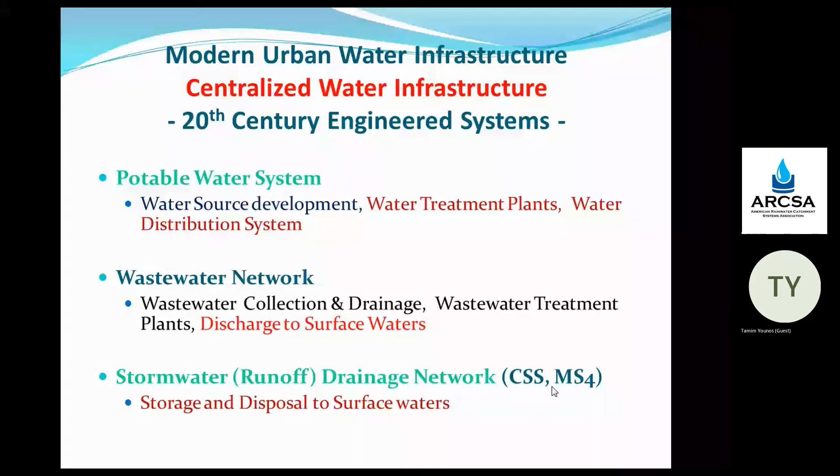So centralized water infrastructure brought a lot of good things to urban areas and a lot of healthy life. But now as we are entering the 21st century, we see the aging of this infrastructure, with a lot of breakdown and leakage. We see water scarcity and flood in urban areas. We see the need to adapt to climate change and extreme weather conditions. We see energy intensive water infrastructure. And we see cybersecurity issues, which relate especially to centralized drinking water infrastructure.

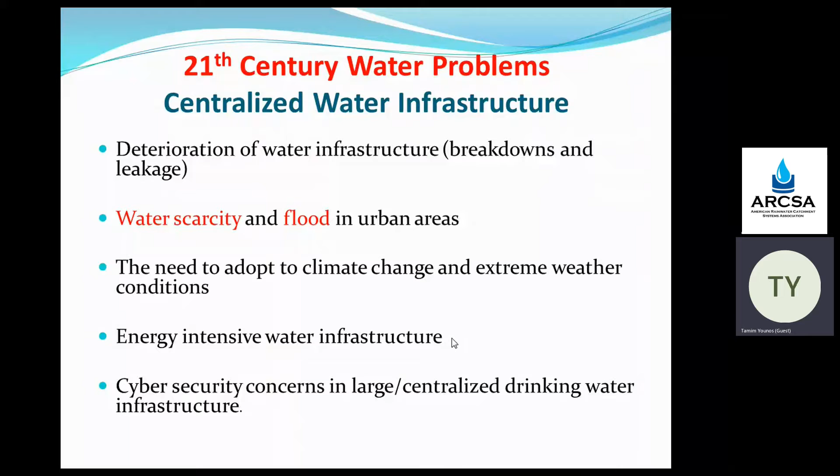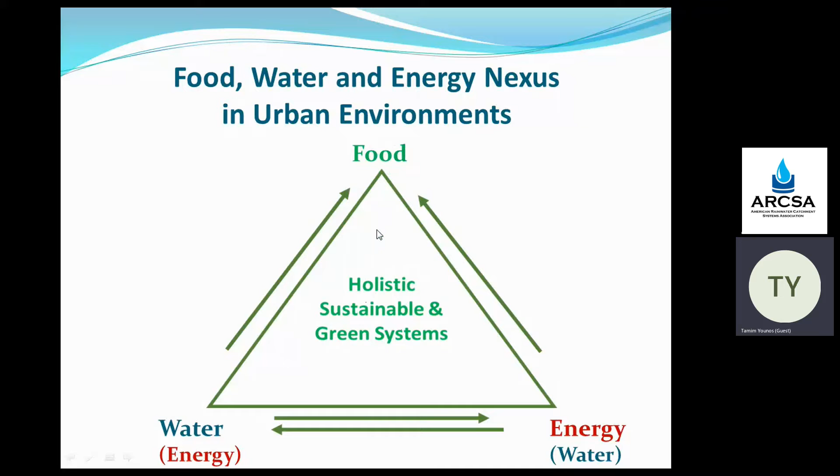So from centralized systems, we are moving to decentralized water infrastructure. And basically, these are smaller scale water management and water infrastructure systems, which are not centralized. So we can have smaller scale, we have it localized.

Here is the vision for a future. If you see here, we show decentralized water infrastructure, which has got several components. If you see rainfall, rainwater harvesting is one component. We have porous pavement, for example. That's another component of this decentralized system. We could have rain gardens, another component. Urban ag, like we could grow food around here and other things. So this is kind of the water component of it.

And also this building and these paved areas produce wastewater and also stormwater runoff. So the vision is that we have a decentralized or smaller scale advanced water treatment system nearby, that we treat wastewater and we treat the stormwater, and the treated water is returned back and used inside or outside the building.

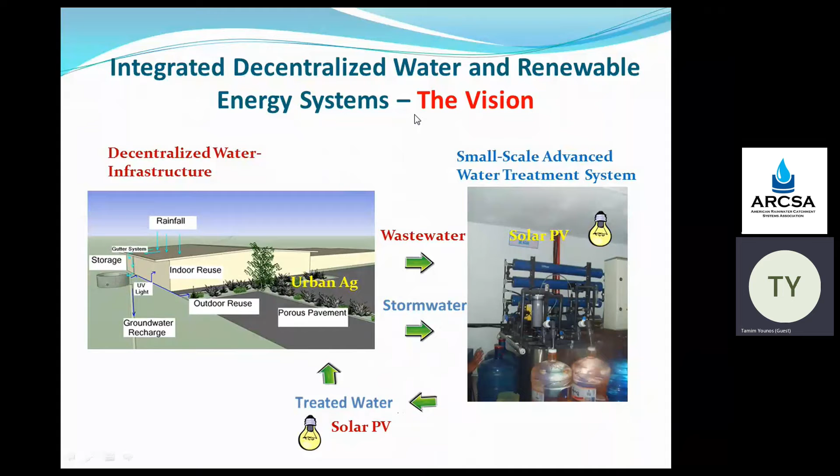So normally water treatment is energy intensive. So the idea is also to use locally available renewable energy, such as solar in this case, to treat this water and deliver it back for use to the building or surrounding areas. So basically, this is the vision which partially is happening, but still we are not there.

So functions and advantages of decentralized water infrastructure. It enhances the potential for using locally available alternative water sources. Alternative means it's not the surface water, it's not the groundwater. So it is probably rainwater, stormwater runoff, maybe saline water, which is brackish water, salt water, or wastewater. These are alternative water sources.

The other major element is energy conservation. When we are using centralized systems, we bring the water from remote areas. So we use a lot of pumps, for example, and we use a lot of energy. So the potable water systems for centralized systems are very energy intensive.

But with decentralized systems, since we are trying to use local water sources, we save a lot of energy there. And also with smaller systems, there's more potential to use locally available renewable energy sources, as I showed you the solar PV in the previous slide, for water treatment and also for in-building water distribution.

And then also decentralized systems enhance cybersecurity. If you are watching the news, centralized drinking water systems are under attack. With a larger population, there's larger risk. Centralized systems sometimes serve thousands and millions of people. But with smaller systems, we serve a smaller number of people. So cybersecurity is a little bit more safe for decentralized systems.

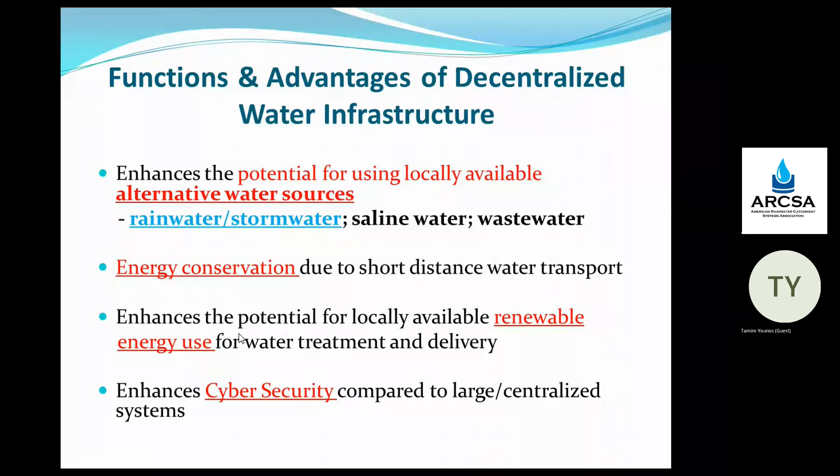So as we know, the topic of our talk today is rainwater harvesting. And rainwater harvesting is a major component of decentralized systems, which have other elements too. Within rainwater harvesting, there are two major branches. One is rooftop rainwater capture and use. The other is stormwater runoff capture and use.

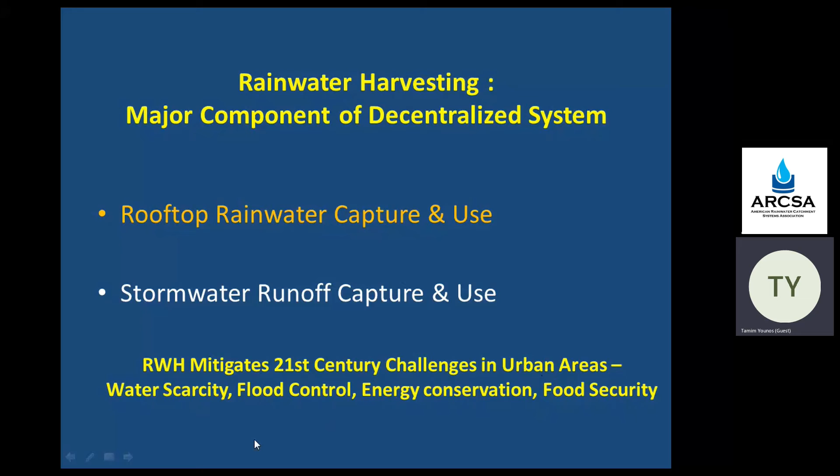So basically, rainwater harvesting systems mitigate the 21st century challenges in urban areas. It deals with water scarcity, flood control, energy conservation, and food security. And these are all advantages of rainwater harvesting systems.

So here on the left, we show rainwater uses, on the right, benefits. All these uses bring different types of benefits. Like indoor uses, rainwater is used for non-potable uses such as flushing toilets and cooling, which is becoming common nowadays, but not as common as we'd like to see it.

So if we use rainwater for indoor uses and also outdoor uses, shown here, lawn irrigation, car wash, gardening, it facilitates water resource conservation. This amount of water we do not bring from surface water, but we use rainwater. Normally at least 2/3 of potable water is used for these purposes, and rainwater could be used instead.

So emerging uses: potable water, urban agriculture, groundwater recharge, and urban aesthetics. Potable water, of course, rainwater has been used for drinking for centuries, but here we are talking about larger scale commercial buildings, a larger scale of rainwater use compared to a very small household, which already use rainwater in many places.

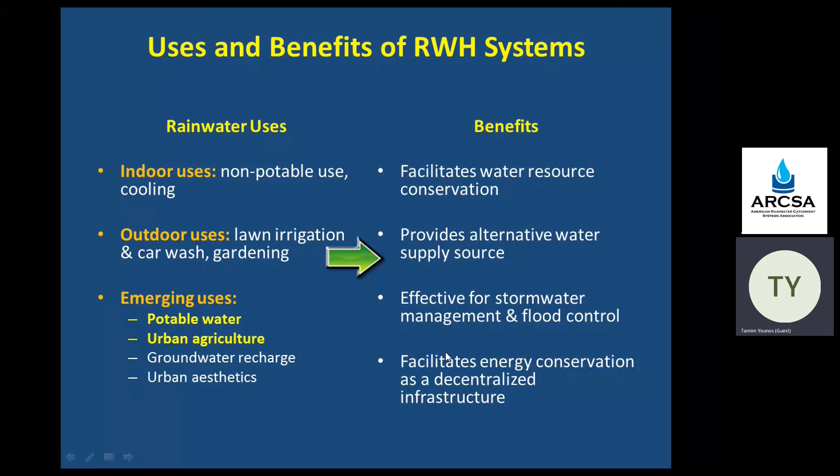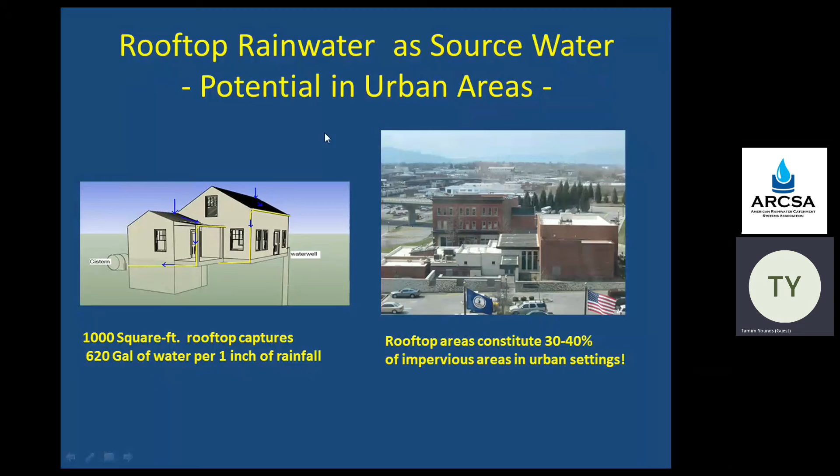The other one here, rooftop areas constitute 30 to 40% of impervious areas in urban settings. So as we said, we have two types of impervious areas, paved areas like roads and parking lots, and rooftops. So rooftops are 30 to 40%. And our talk today mainly relates to rooftop rainwater applications.

So to give you an example, this is Hampton Roads, Virginia, and I want to show you the rainwater as a potential water source or alternative water source. Hampton Roads is by the Chesapeake Bay. It's called Hampton Roads, but it includes Newport News and Norfolk and Virginia Beach and all other cities. So it's a number of cities. Also, there's a place called Hampton too. So it's a large area which uses a lot of water, and there's the James River and other rivers, the Elizabeth River in the area, which flow to the Chesapeake Bay.

So estimated urban stormwater runoff from Hampton Roads. So here I picked up only 3 cities. If you see, for example, for Norfolk, 1,250 million gallons of stormwater runoff could be collected from impervious areas. For Hampton Roads total, which includes some other cities here, 12,563 million gallons of stormwater runoff, which right now flows to the rivers and the Chesapeake Bay. And actually, some studies show this is also a reason for a little bit of sea level rise or ocean water level rise in the area, because we get so much stormwater runoff there.

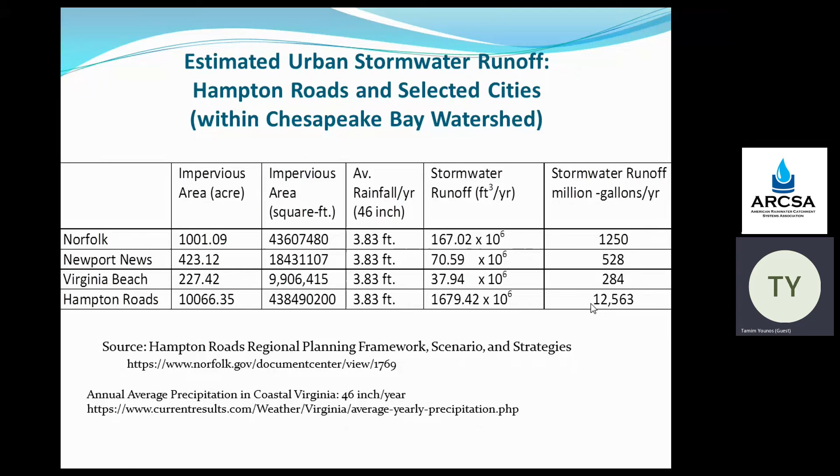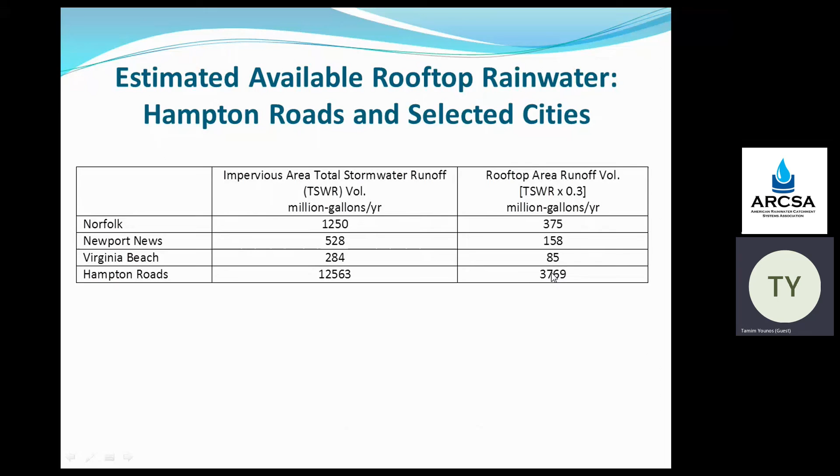So here I used that impervious area total runoff from the previous slide, and took 30% of that, because with the lower estimate, rooftop is 30% of the area in these cities. So in Hampton Roads, from rooftops, we can collect 3,769 million gallons of water per year. And these numbers show the 3 cities.

So to summarize this, in Hampton Roads, Virginia, stormwater runoff produces 12,563 million gallons of water per year, and rooftop rainwater, 3,769 million gallons per year. So since we are not using this water, it goes to the rivers and the Chesapeake Bay. So I call these wasted waters, which actually have a lot of potential.

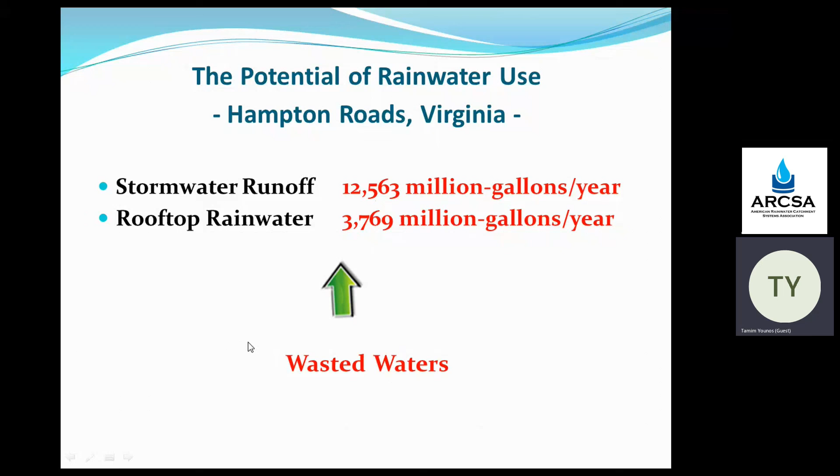So the goals of today's session are to discuss cutting-edge topics in rainwater harvesting. Rainwater harvesting for potable use, as I said, applies to commercial buildings, and rainwater use in urban agriculture, which relates to food security. And of course, cost is a major issue. So life cycle assessment of rainwater harvesting systems is a major issue that some researchers are working on.

So here I want to introduce our speakers. Our first speaker, Dr. Philip Thompson. He's a professor of civil and environmental engineering, Seattle University. You can see his bio on our website, the ARCSA website. He has done a lot of studies on water treatment and potable water systems and environmental justice, all sorts of things. But today he will talk about use of rainwater for potable purposes.